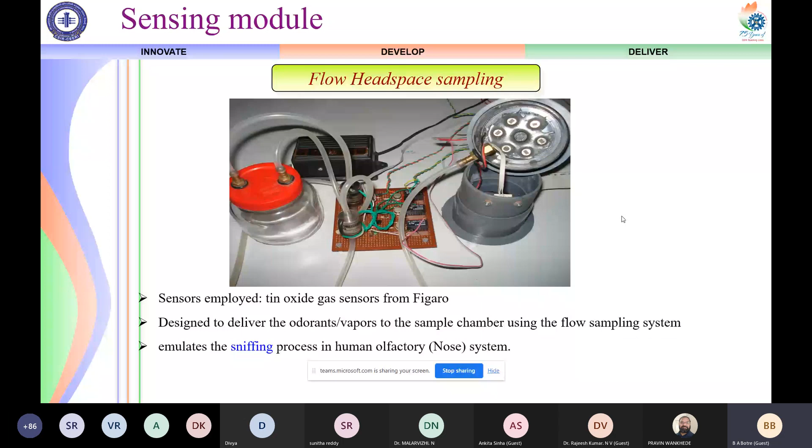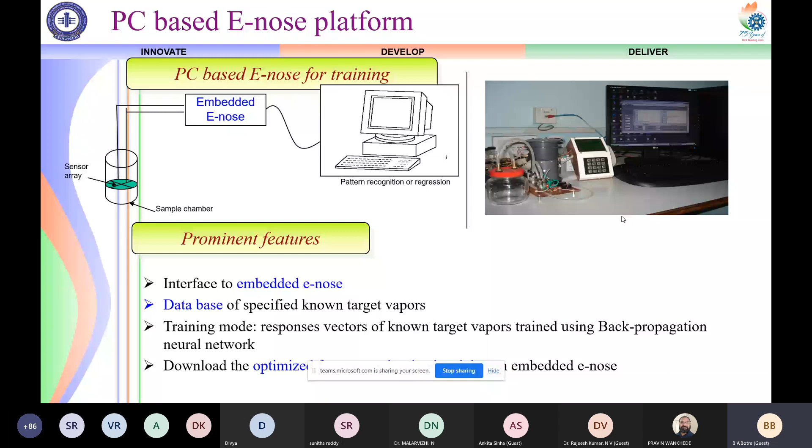The PC-based eNose is working with software developed indigenously for data acquisition, signal preprocessing, and learning the odor patterns based on artificial neural networks. These were developed indigenously in software to interface with the embedded electronic nose.

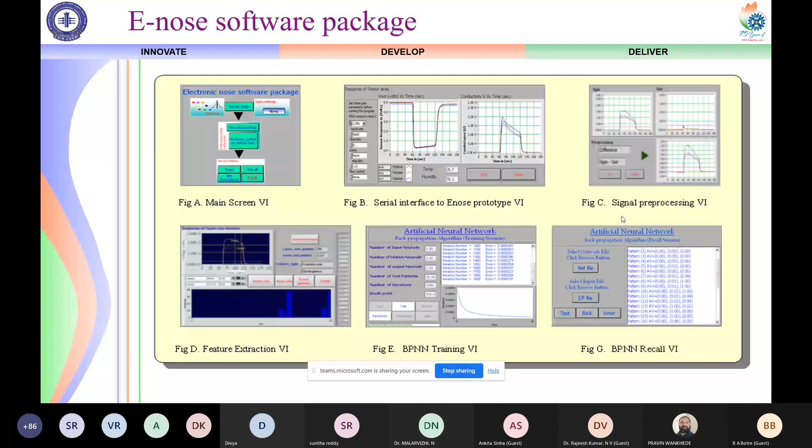As I mentioned earlier, during that time, around 2006, 7, and 8, we were using the 8051 microcontroller. During that time we had used backpropagation neural network for the detection of various patterns of smells and odors, and incorporated it into this as a product technology.

Now, with the advancement of the Internet of Things, these electronic noses can be interfaced with IoT. Various electronic noses can be interfaced with IoT for monitoring as well as analytics purposes of various odors emanating from various industries and various places in our country as well as outside the country.

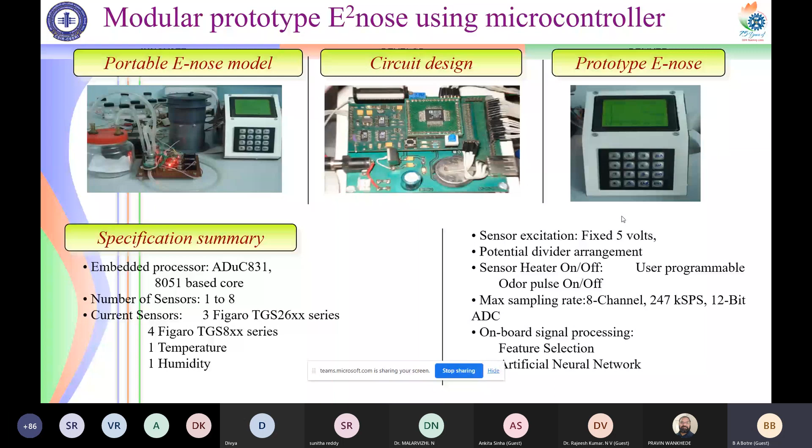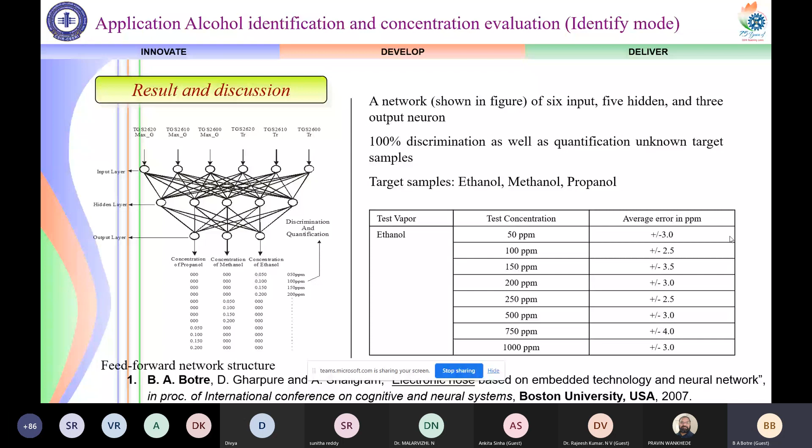The work developed in University of Pune was presented at an international conference held at Boston University during 2007. In conclusion, during the PhD research, we were able to develop an experimental setup of PC-based electronic noses, a prototype of embedded electronic noses, and their functionality and various operations were tested for food freshness detection as well as alcohol qualification and quantification. The research performed was presented in various journals as well as international and national conferences.

Now we will be moving towards development of a mobile odor tracking robot based on embedded technology. As I mentioned earlier, we developed electronic noses as part of research, and then we transformed that electronic nose prototype onto a mobile platform to track odor, which is essentially needed in various industries for detection of, let us say, explosives or any hazardous or toxic gases emanating from various places.

The concept was very simple. The electronic nose was interfaced with the mobile platform, and it was programmed in such a way that it was detecting odors coming from different directions, with this capability incorporated as an algorithm on the microcontroller, which was enabling detection of the odor as well as smell and giving actuations to the motors fitted onto the robot.

So this was the concept with which we started this activity, and we developed a prototype of an odor tracking robot based on indigenously designed hardware using the Atmega 32. It has an interface of A to D converters for interfacing different gas sensors and their signal conditioning.

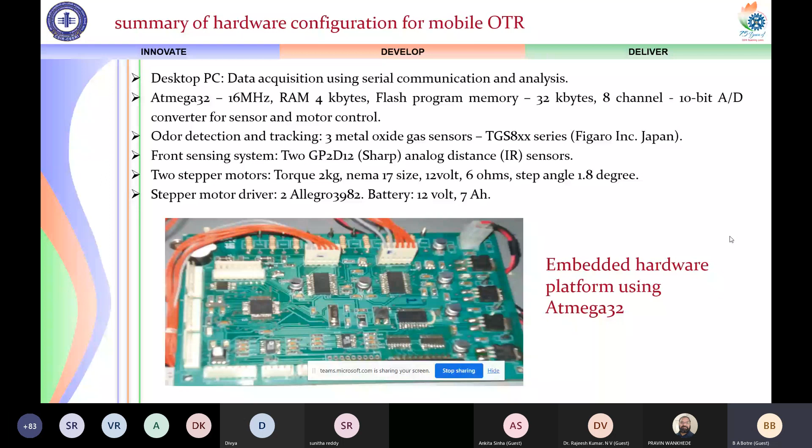This is the driver circuit which we developed during that time, and algorithm subroutine modules such as sensor A to D signal conversion, heater and fan control, motor control, LCD, keypad, serial data acquisition, and odor tracking algorithms were developed during that time in C language and incorporated onto the embedded system.

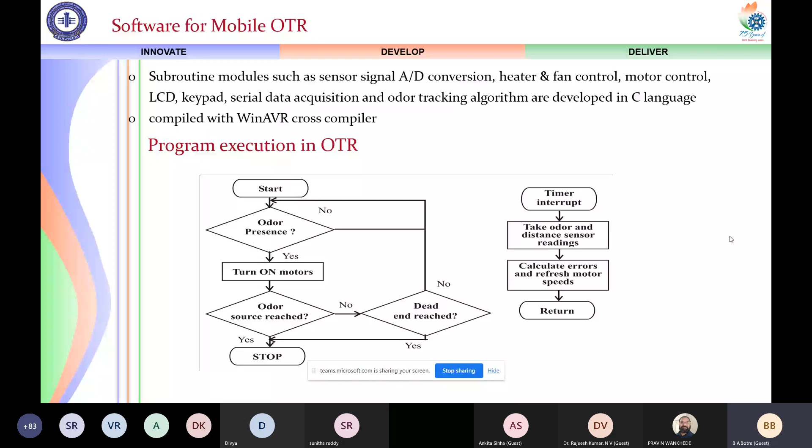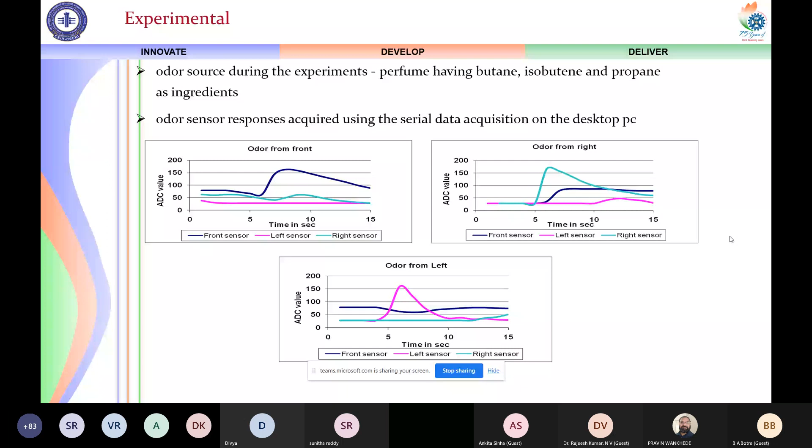Program execution in the odor tracking robot was successfully tested and demonstrated in our laboratory. These two slides highlight the tracking and sensing of odor data coming from different directions with the help of gas sensors, and processing that data with the help of the navigation algorithm implemented onto the mobile odor tracking robot. The robot prototype was developed successfully and tested in our laboratory.

This was tested with the help of some perfume odor source activated at 4 different locations, one after another. Two obstacles were placed in the approximate path of the robot, and it was allowed to pass through. It could detect the obstacles as well as track the odors as mentioned in the trajectory path.

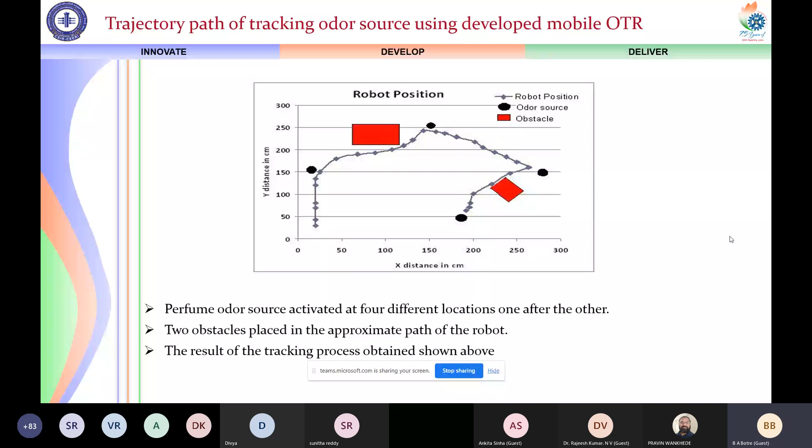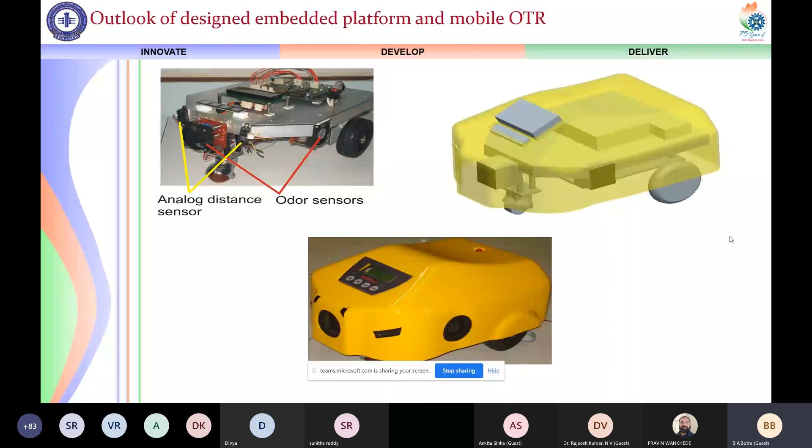This is the prototype of the skeleton of the robot as well as the final prototype of the odor tracking robot. It was presented at one of the IdeenExpo during 2009, and the Ministry of Science and Technology, Germany invited our team to participate there for 10 days.

This was developed as a prototype in one of the university laboratories. The German ministry invited our team to demonstrate this prototype to their students aged between 6 to 14, to give them motivation and inspiration seeing that such robots exist and researchers are inventing them, encouraging students to grab their attention and generate interest.

We have another 4 minutes before the break, and I would be giving you glimpses of the gas sensor system based on IoT for environment monitoring. This technology was developed in CSIR-CEERI during 2016 to 2019 as part of CSIR's FTT project.

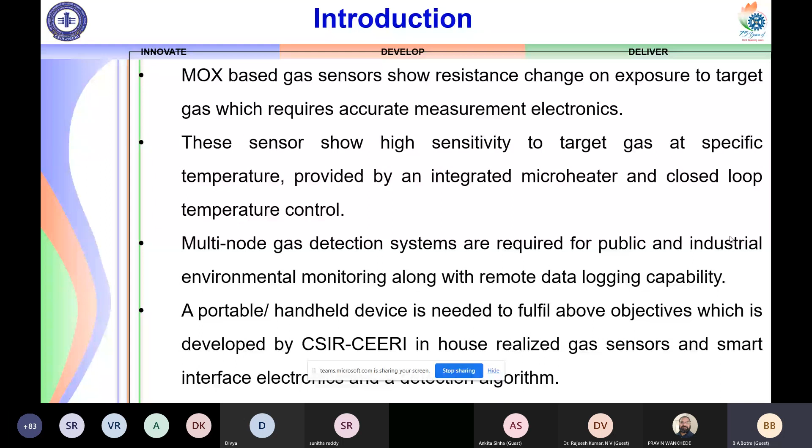This is the prototype of the gas sensor interface electronics and handheld display. We focused on readout electronics, which involved interfacing the gas sensor, signal conditioning, developing decision-making algorithms, and transmitting data onto the IoT platform. This is the prototype of the wall-mount gas sensor system developed in our CEERI.

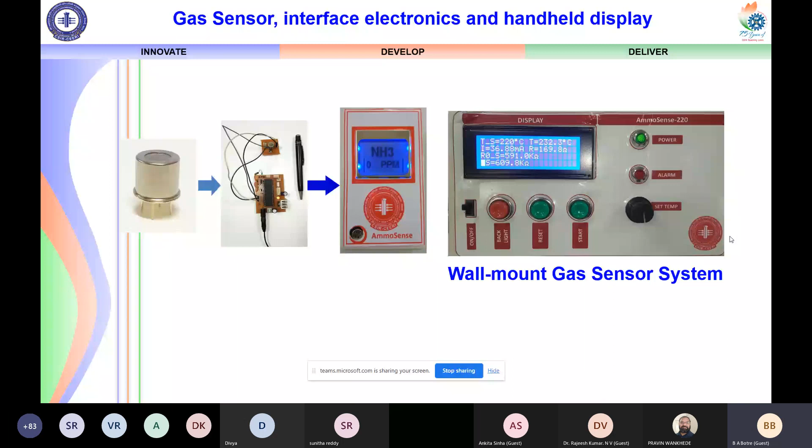These are a few of the experimental results performed with the gas sensor system in our laboratory. It was exposed to ammonia at different concentrations, and ammonia concentration versus resistance versus alarm plots are shown here. Extensive laboratory testing was performed with the gas sensor systems.

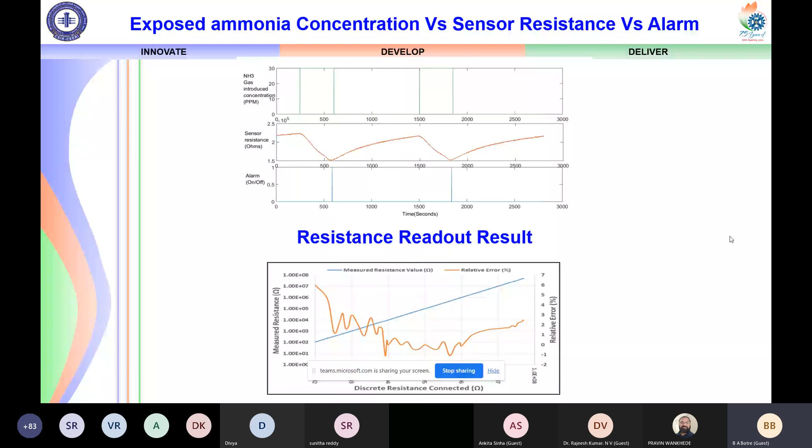A small program on PC was developed for recording data for further development of the closed loop control system needed for the microheater embedded inside the gas sensor and measurement of resistance.

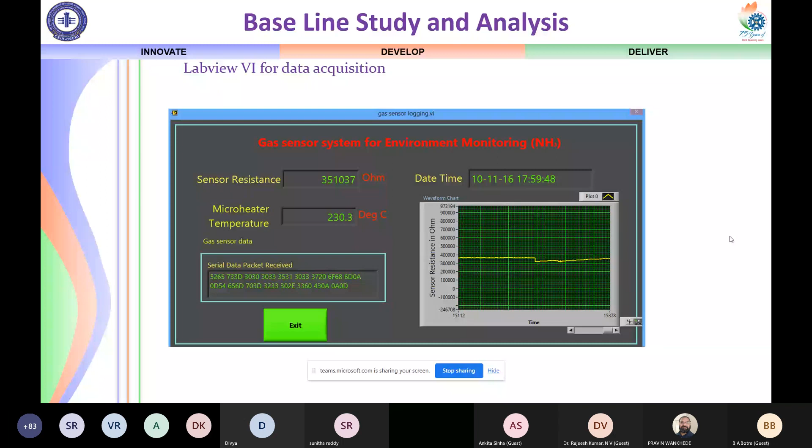These are plots of the algorithm output compared with sensor resistance, showing the baseline characterization performed in our laboratory.

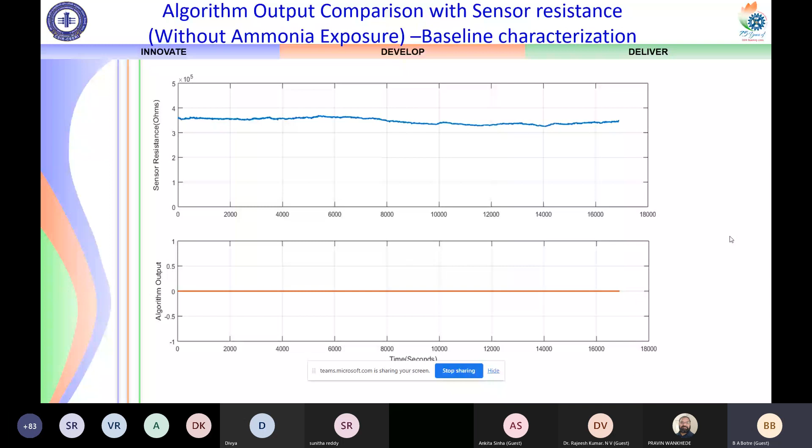These are the same plots, again showing baseline characterization. Here we show the actual exposure of ammonia gas to the gas sensor and their detection limits.

On exposure of ammonia gas to the sensor, our prototype could detect and give the alarm, and those alarms were recorded with the help of the indigenously developed data acquisition system.

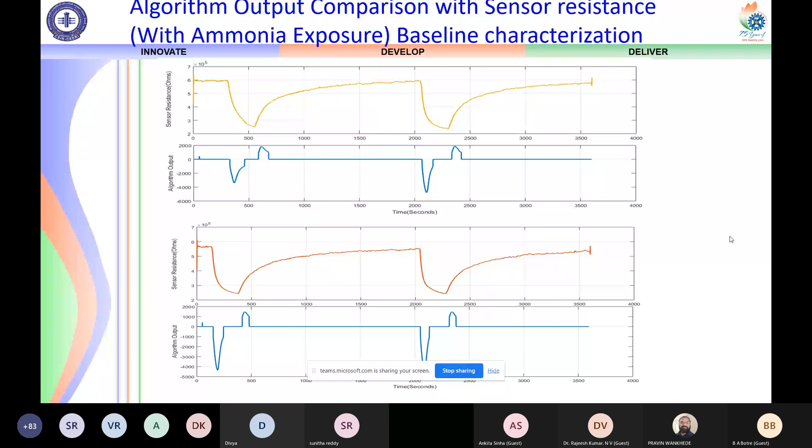This is the response of another algorithm which we developed in our laboratory for the detection of ammonia.

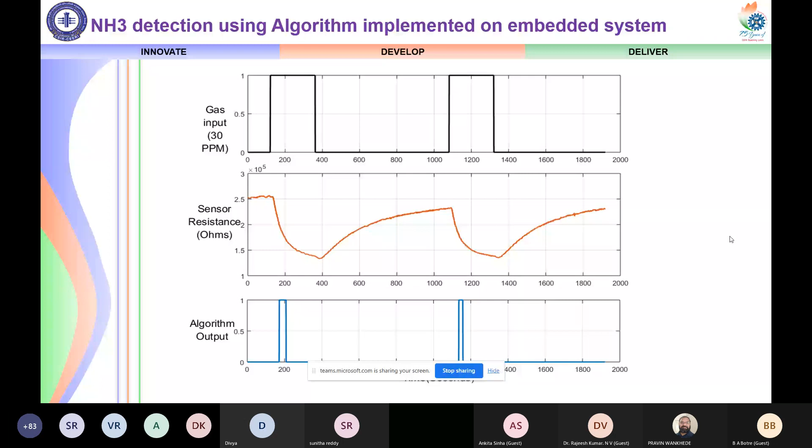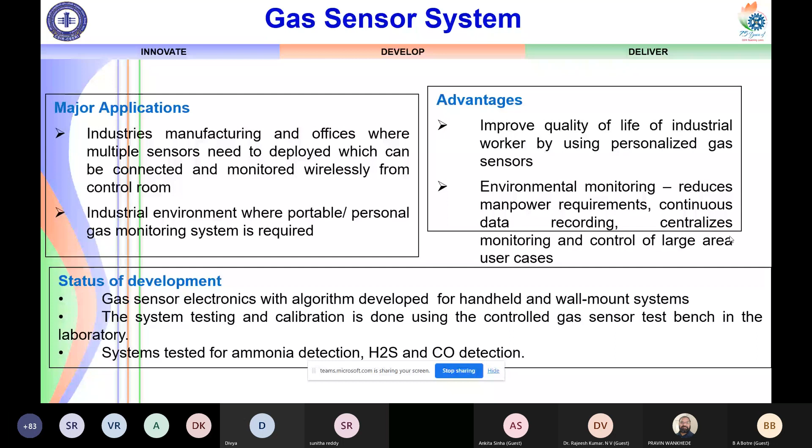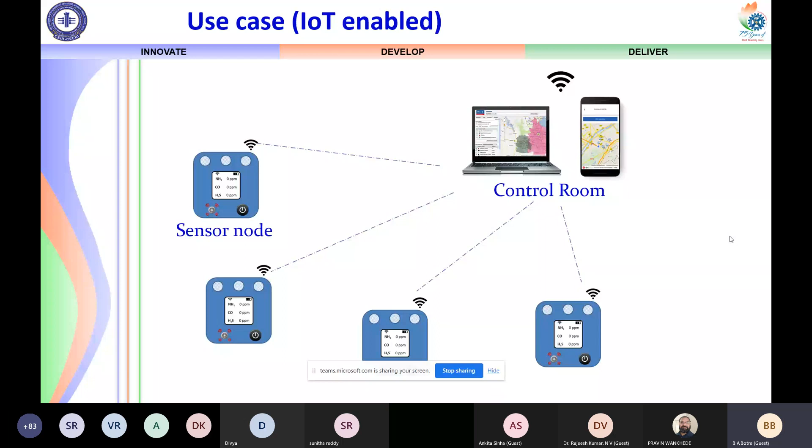Dear friends, as I mentioned earlier, guided by Professor Devsarkar sir, individual work could not achieve success. We have to work in a team, looking at different aspects of the prototype during research and invention.

We have to learn, implement, and keep practicing to take this research, convert it into technology, and then to the production level.

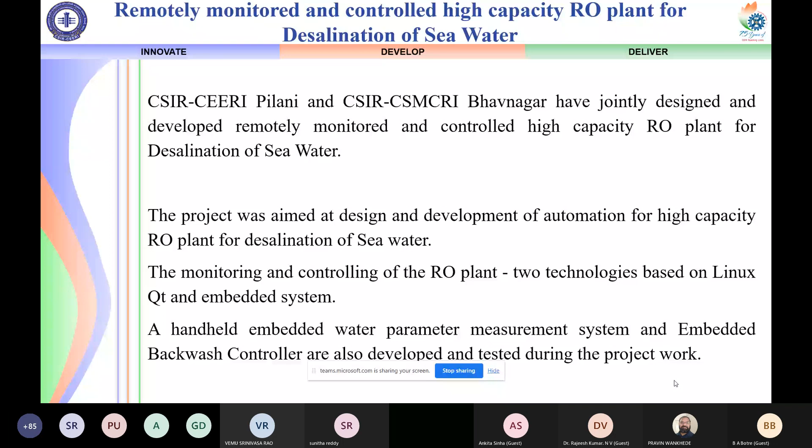Dear friends, I would like to say with immense pleasure that we could not only monitor the plant, we could generate control remotely with the help of the developed system. As you are all aware, monitoring with IoT devices is a simple task since all the devices are well organized and available. But developing electronics, interfacing it with IoT platforms, and generating control remotely by sitting in CSIR-CEERI, 1500 kilometers away, while controlling the plant situated in Bhavnagar from anywhere in the world, was the great success of this project. Our team worked hard, putting in all their perseverance and passion to develop this technology.

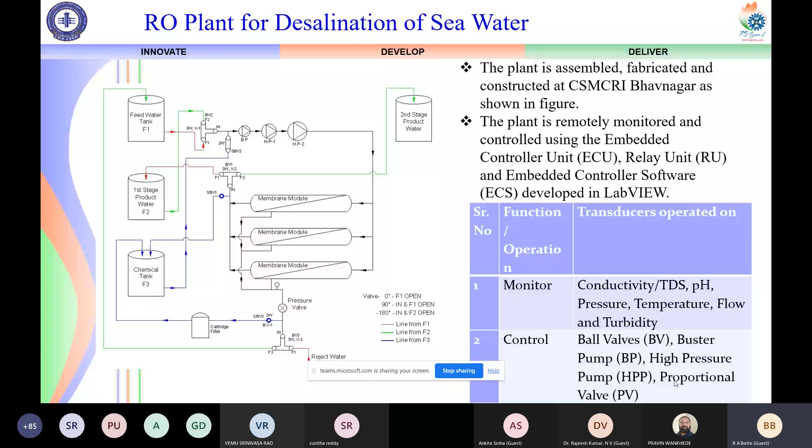This is the stack of the RO membrane, assembled and arranged in parallel and series combination for deriving the two-stage desalination seawater purification RO plant. This plant is controlled with the help of automation developed by CSIR-CEERI, and you can see various blocks of the plant. The arrows aren't visible, I'm sorry for that, but let me check the pointer. Yes, correct. So these are the RO membranes stacked in parallel and series combination, fitted in two stages.

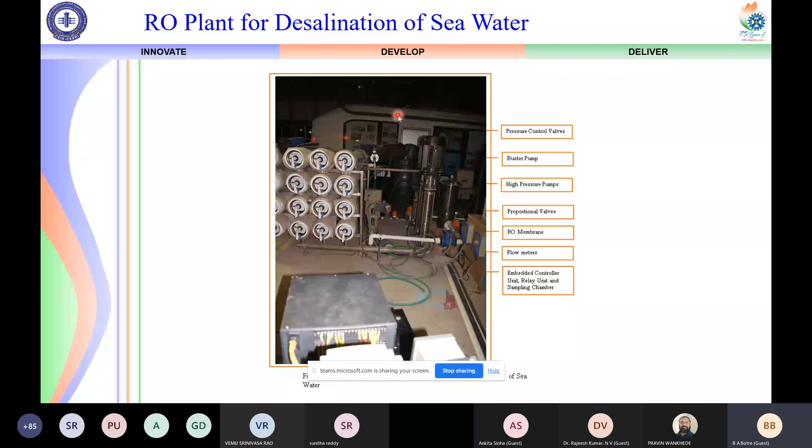Another experimental platform for RO automation based on Linux Qt system for monitoring and controlling desalination of seawater was also developed. The purpose was to use platforms which are open source.

I'm sharing different platforms which are either based on open source or on commercially available developmental platforms like Microchip's products, LabVIEW, and MATLAB products. These products have their own advantages and drawbacks, and it completely depends on the bill of material of the product's development, their usages, and their licenses.

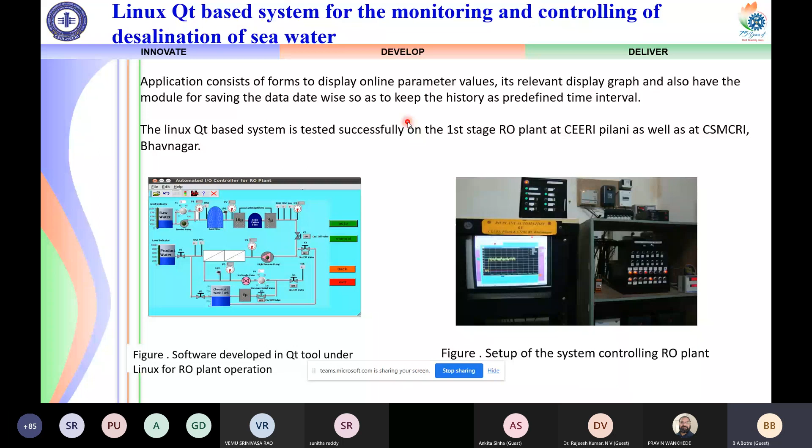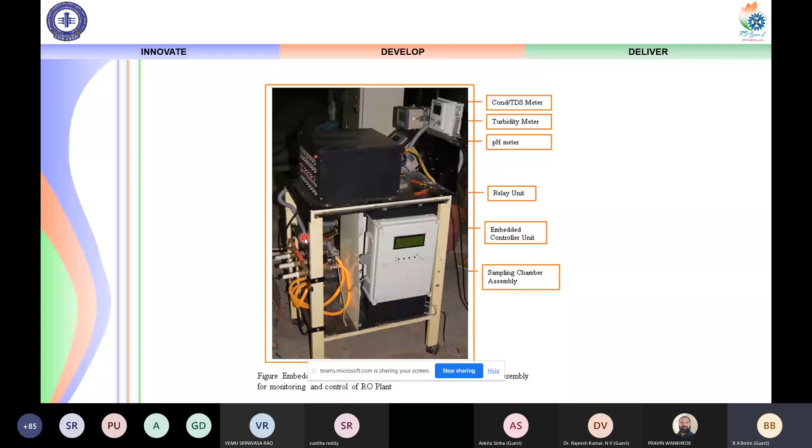You can see their wiring diagrams and the small chamber for collecting the raw water, monitoring it, then flushing it, then collecting the clean water, monitoring it, and flushing it. This is the cycle used for monitoring the parameters of the water.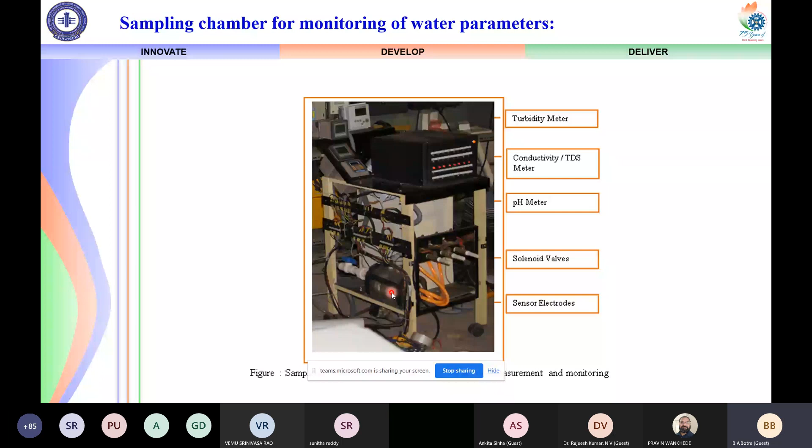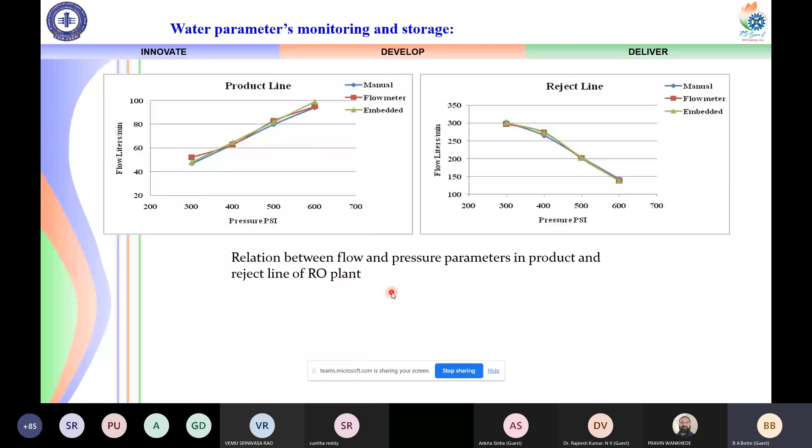These are the responses obtained for the product water, clean water, and reject water. These are the flow versus pressure plots obtained for understanding the performance of the RO membrane used for desalination of seawater — the relationship between flow and pressure parameters for the clean and reject waters. These are a few of the parameters we could record with the help of the embedded controller: conductivity, TDS, temperature, pH, and turbidity.

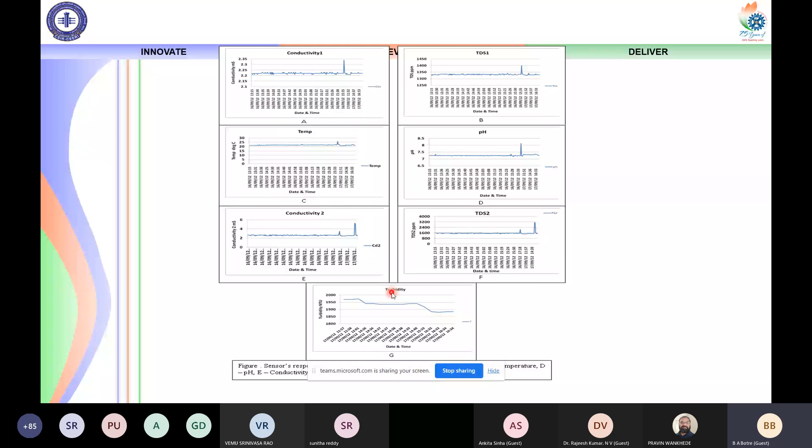This is the dashboard we developed with the help of LabVIEW software on the PC, which was interfaced with the embedded microcontroller. The embedded microcontroller was acquiring data from all the sensors, processing it, and transmitting it onto the IoT platform interfaced with the control room's dashboard with the help of LabVIEW Internet of Things toolboxes.

On the dashboard you can see various parameters of the sensors, recorded data, and RO modes of operation for controlling. The second pane shows the data recorded, which is then subsequently ported onto an Excel file with date and timestamp.

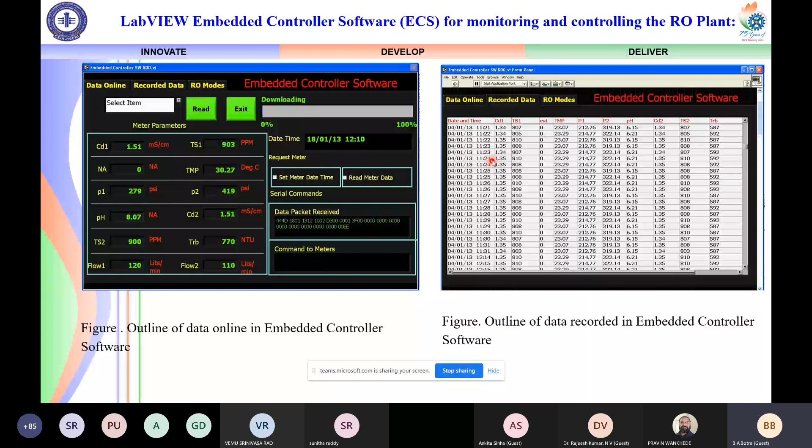These panes show the remote monitoring and remote controlling of the plant in different modes with the help of the Internet toolbox incorporated into the LabVIEW software. The right hand pane shows operating the plant from Internet Explorer, and the left hand pane shows controlling the plant on the dashboard.

So this is the technology I shared with you for remotely monitoring and controlling any water purification and recycling plant. This technology was developed and demonstrated almost 10 years back with the advent of new open source platforms like Linux, Python, TensorFlow, data processing, and statistical toolboxes. We can develop the same capability with the help of open source platforms and bring down the bill of material to enhance the capability of usage of the platforms.

At the same time, we can use state of the art technologies nowadays, recent developments, to make it much better than the technology we developed 10 years back. Certainly, toolboxes based on Linux operating system, Python, TensorFlow, and other toolboxes, along with IoT hardware available in the market nowadays, are enabling us to develop state-of-the-art remotely monitoring and controlling RO or recycling and water purification plants very speedily and in a short amount of time. I believe recent developments and availability of these platforms and toolboxes would certainly change our lives and development cycles of any product.

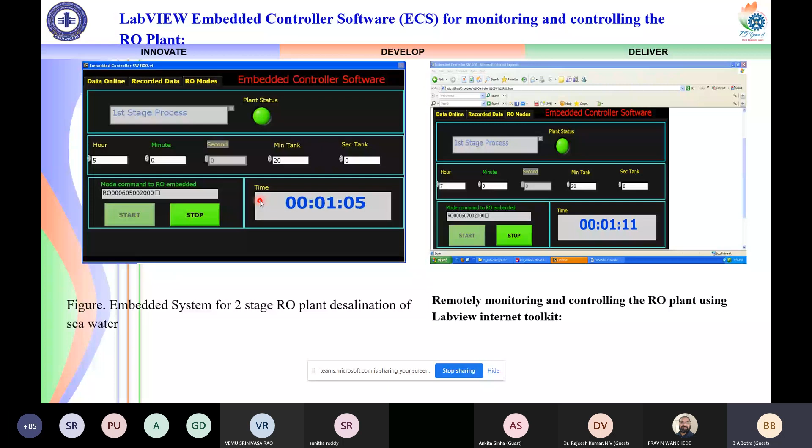Next, I will be talking about design and selection of online sensor solutions for water treatment systems. This water treatment system is associated with one of the project activities of Smart Water Grid, which was designed, developed, installed, and commissioned in our CSIR-CSIO. The project was titled IoT enabled priority based smart water distribution network system for community usage.

We considered three parameters before designing the smart water network. The first parameter category was based on water quality. What are the water quality parameters we have to take into consideration? Conductivity is the main parameter, then pH, turbidity, and other factors come into the picture — nitrates, temperature, dissolved oxygen, fluoride, and bacterial load. Important parameters, as mentioned earlier, are TDS, conductivity, pH, and turbidity.

Controlling parameters are associated with flow, pressure, filtration, temperature, level, valve condition, pump controls, UV treatment for bacteria to address bacterial challenges, and any triggers needed. Process conditions consist of different set points associated with pressure and flow. For any purification and recycling plant, these are the key process parameters to consider: pressure and flow, water pressure for the RO membrane, UV exposure, leakages, source water level, efficiency, condition of various subsystems, hydraulic conditions, stress, and corrosion.

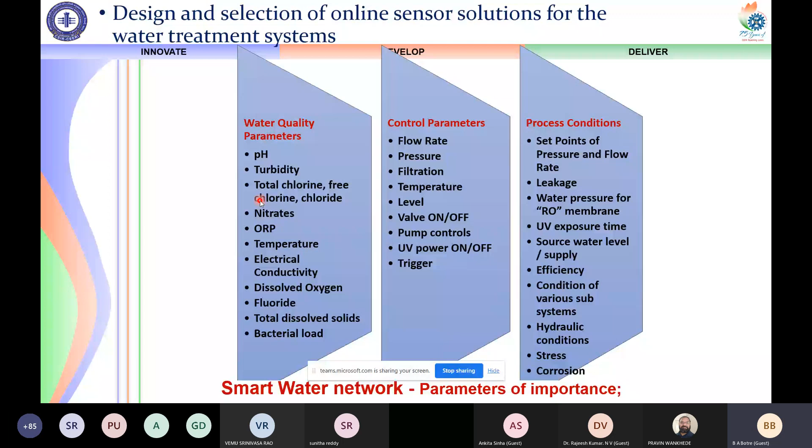This is the basic block diagram of the smart water grid, which consists of a water purification system based on RO membranes, filters, and UV treatment, along with the incorporation of various state-of-the-art technologies of control and instrumentation, IoT, and machine learning techniques for data processing.

These technologies consist of data acquisition, integration of sensor networks, smart meters, smart pipes, smart pumps, smart valves, data dissemination using internet and Wi-Fi technologies, data processing and storage. It would be involving well-known machine learning, AI, and cloud computing for management and control.

It is based on SCADA and PLCs, hydraulic modeling and analytics using EPANET and other well-known software, monitoring for detection, localization of leakages, visualization and decision support.

So with these technologies of water purification and recycling, filters, and state-of-the-art instrumentation and control technologies, one can solve challenges of plant health monitoring, leakage detection, data-driven decision making for controlling the water supply in the water supply network, water quality management, and overall water purification to the supply network.

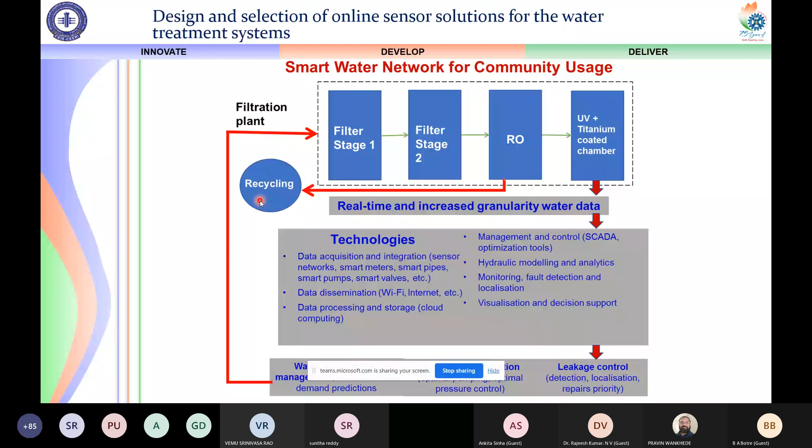This is the setup of the smart water grid which we have in our CSIR-CSIO. It consists of a two-layer structure, pipe structure with various sensors and actuators fitted onto them. Various equipment, sensors and actuators fitted onto the pipe network are mentioned here in the table: pressure transmitters, temperature sensors, ultrasonic flow meters, electromagnetic flow meters, vibration sensors, level sensors, valves, PIV valves.

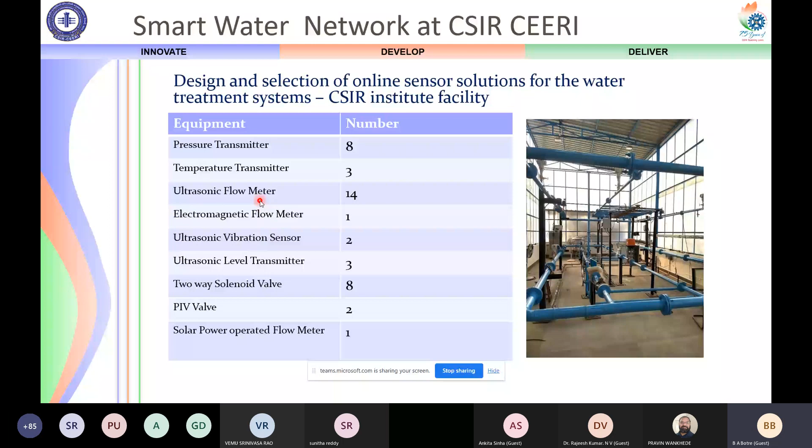Solar operated flow meters - this is the close view of the various devices fitted onto the pipeline structure of the smart water grid. If you see the bottom, it is showing a layer of flow meters, ultrasonic flow meters, which is emulating the water meters needed for billing generation, or making of the billing system automatically.

So we can have sensors to record the usage of water, and we can develop algorithms and associate them with the cost of the usage of water, and we can make a billing system automatic and send it to the end user. Other devices fitted onto the two-layer architecture of the pipe network are given in the table, like TDS sensors, pH, turbidity, SCADA and PLC mechanism, tanks and pumps.

So this is the capability or experimental setup test rig which we have in the form of an IoT enabled smart water network in our laboratory, which is enabling us not only to study, model and simulate the water supply network, but whatever we perform as a simulation study, we can implement and test robustly in our laboratory with the help of this experimental setup.

Now I'll be talking about the next project activity, which is associated with the AI controlled linear displacement actuator based on thermoresponsive smart materials. It is SMILDAS. It was a sponsored project under the CSIR mission, performed by two organizations - the leading organization CSIR AMPRI in Bhopal and CSIR CEERI. AMPRI team developed the SMA actuator, smart materials actuator, and CSIR CEERI team indigenously developed the AI controlled electronic hardware for operation of the smart material based actuator.

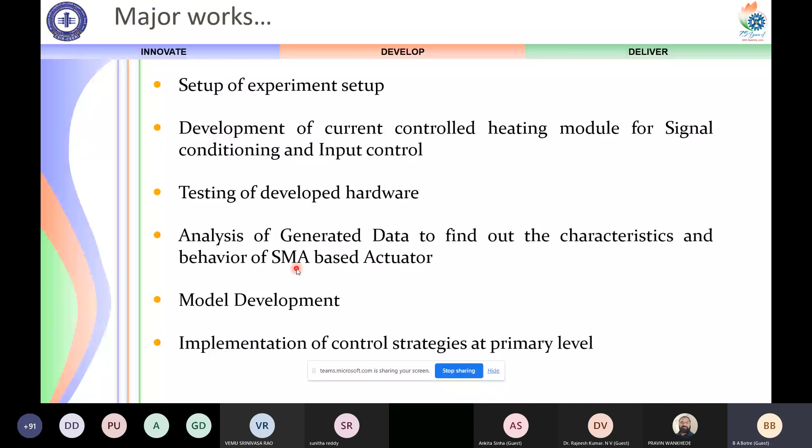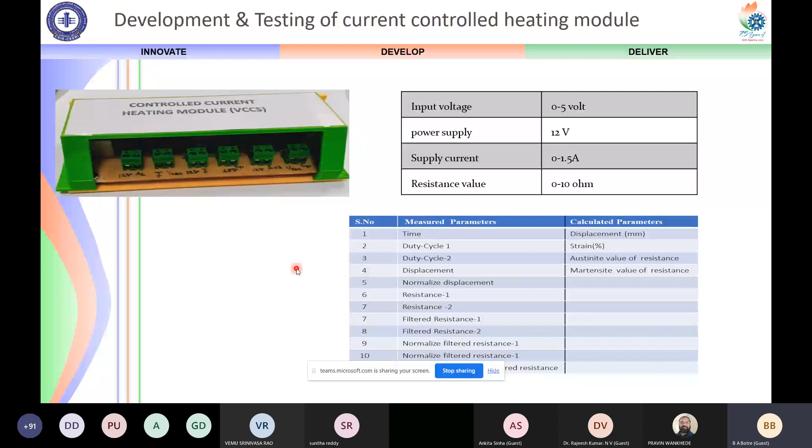This is the heating module and their specifications which we developed in our CSIR-CSIO for controlling the SMA actuator. These are a few of the improvements in the SMA actuator driver board which we considered and made during the development cycle.

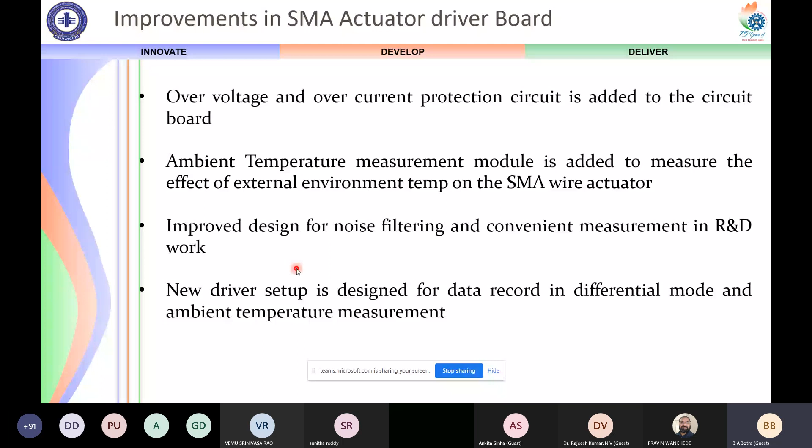The main purpose of development of the AI controlled SMA actuator was to make the system sensorless. For any actuator, feedback is essential, but with this small low cost actuator, using costly sensors is not feasible. To overcome this challenge, our team used electrical and mechanical parameters of the actuator itself to record and measure the displacement with the help of AI technique, which enabled us to make the system sensorless and generate the control action based on AI techniques.

This LVDT is used during the experimental purpose only. Subsequently, while fitting the actuator onto the 3D printer, only our electronics and actuator were fitted, using self-sensing capability and AI-based control action.

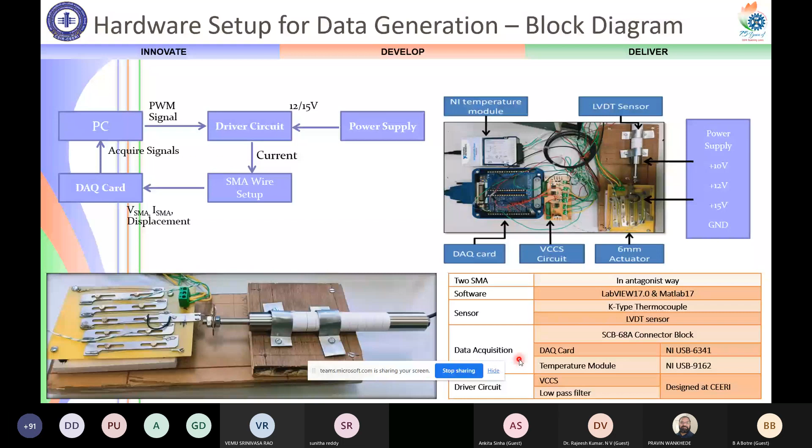A complete setup is shown for experimenting, data generation, training using the AI technique, developed for generation of the control action, and making the measurements for fulfilling the sensorless development of the SMA actuator. These are the specifications of the DAQ system and data generation.

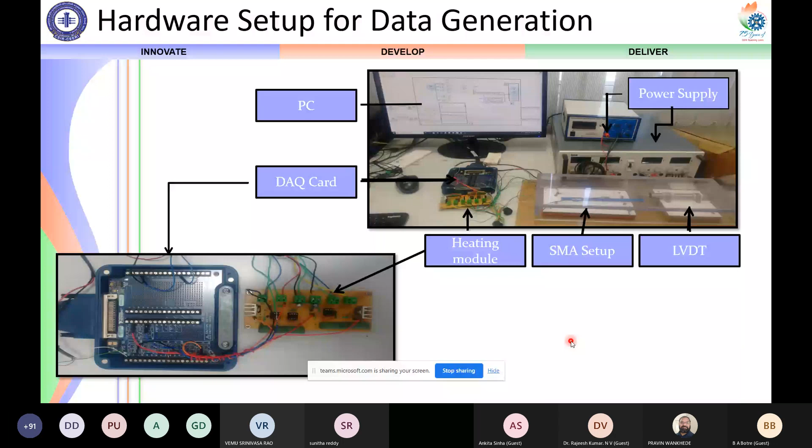During the development cycle, we perform various analysis techniques on the data to find out the characteristics and behavior of SMA-based actuators. These actuators behave such that on excitation they contract, and after removing the excitation they expand. But while performing these actions they exhibit hysteresis, and this hysteresis is the challenge for research. Our team developed an AI controlled mechanism to compensate for the hysteresis, transforming the SMA actuator from austenite to martensite and martensite to austenite phases.

These are the necessary improvements in software which we performed for improvement of the data circuits. As I mentioned earlier, any research requires modeling and simulation. For the SMA actuator, we performed modeling and simulation with the help of thermal modeling, and their modeling stages are given here, based on electrical current, wire temperature, austenite fraction, and mechanical strain.

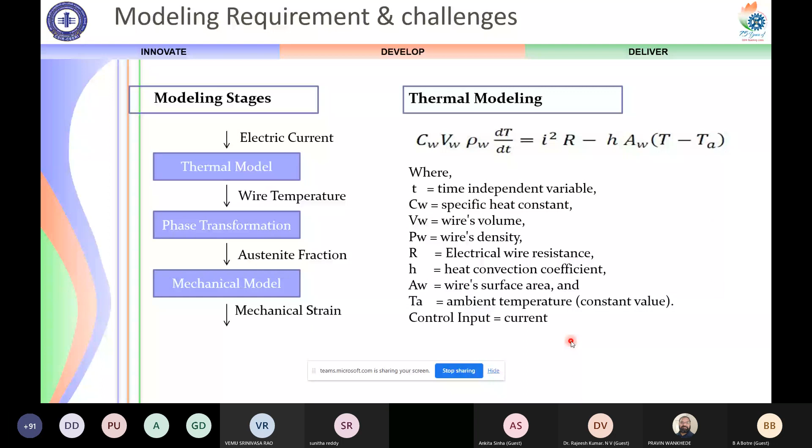Two models our team proposed. One of our scientists, Samar Singh, developed this AI controller indigenously in CSIR CEERI. The first model he proposed was based on a single layer architecture consisting of resistance difference, single layer RNN, and displacement.

The next model he proposed was based on an intercoupled RNN, which takes into consideration the SMA actuator's two wires and their intercoupling parameters. The RNN parameters are tuned such that the effects of both SMA wires fitted onto the actuator are reflected into the development of the proposed RNN architecture to derive the displacement parameter.

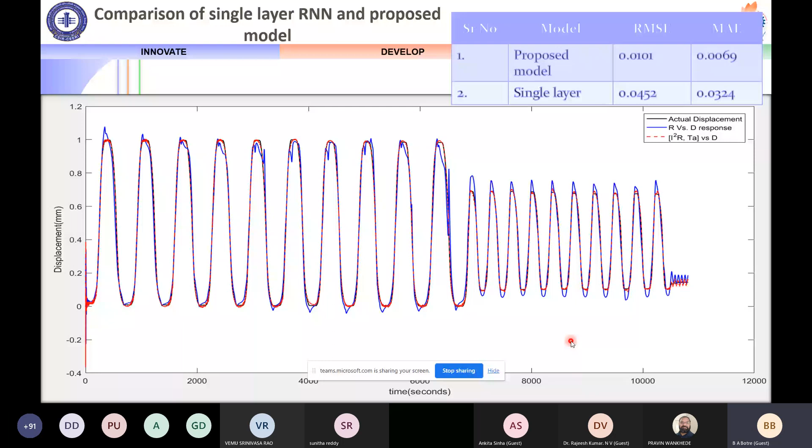Dear friends, I have given you a few highlights of the research we perform in our laboratory, from the perspective of modeling, simulation, model development, their implementation, and robust testing.

From here onwards, technology development and prototype development begins. In the next AI mission project, our team proposed to develop the prototype technology of the 3D printer model, interfaced with the indigenously developed SMA actuator and AI controlled linear displacement sensor.

Now let's come to the last assistive technology project we are working on in our laboratory. It is associated with making a low power electric vehicle for outdoor mobility of differently abled persons. The project was sponsored by DST as well as under the CSIR mission.

I'm sharing a few of the activities we performed, not the complete set, due to IP and copyright limitations. One study we performed was parameter estimation and comparative analysis of control design techniques for BLDC motors. As you are aware, BLDC motors available in the market are mainly imported from China. The main challenge when designing any control system is having the motor parameters. These Chinese motors don't provide any manual with their motor parameters, so the only option is to derive these motor parameters by performing experiments in our laboratory.

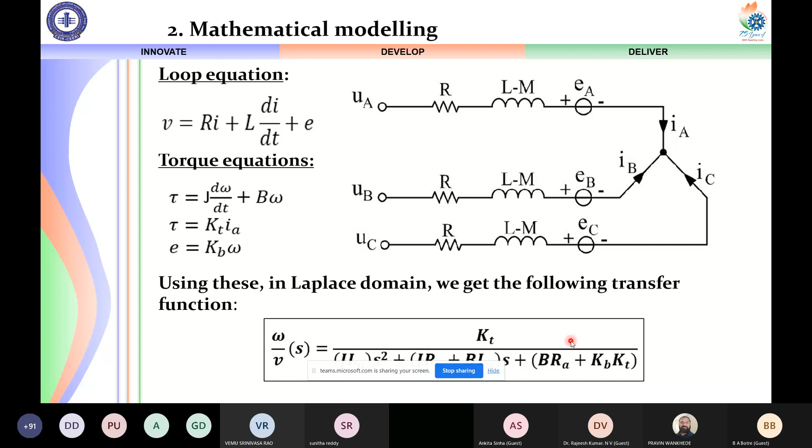The input and output parameters, motor parameters, or derived parameters are considered in this equation. These are the parameters which we derived in our laboratory for a BLDC motor of 250 watts, including stator resistance, stator inductance, moment of inertia, friction coefficient, torque constant, and back EMF constants. These values were derived experimentally in our laboratory.

Another aspect we worked on was deriving the gear ratio for obtaining the speed of the BLDC motor. These BLDC motors come with an internal planetary gearbox, and we have to take into consideration its internal gear ratio while deriving the speed measurement. So we performed two experiments: deriving the gear ratio and parameter estimation, before designing the control system.

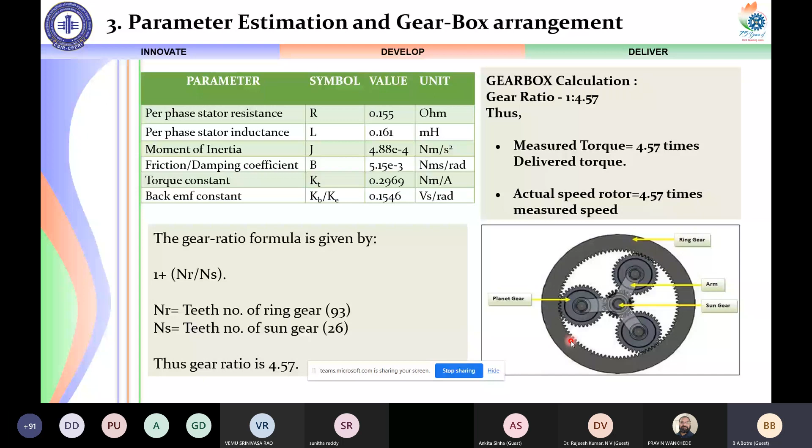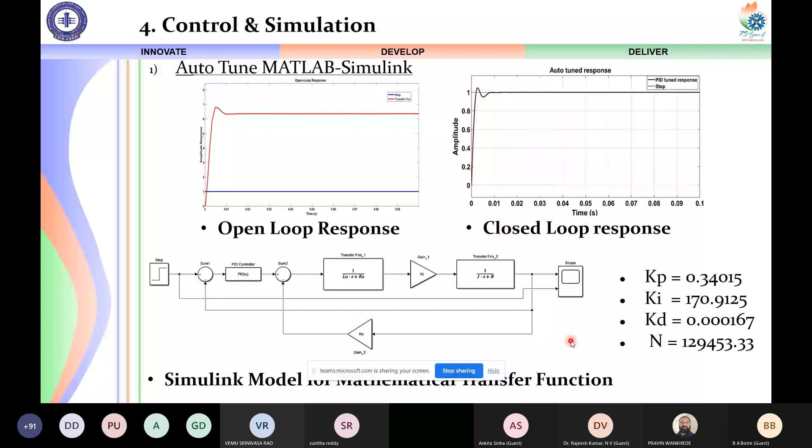Subsequently, we developed normal PID, genetic algorithm, and fuzzy tuning PID based control design techniques onto the physical model of the BLDC motor.

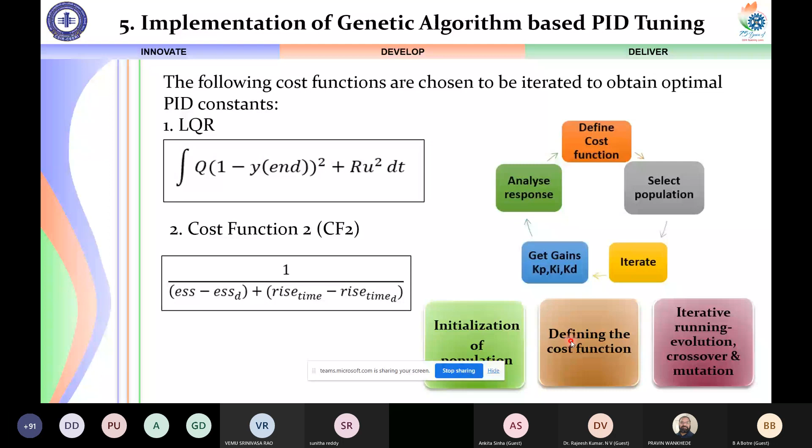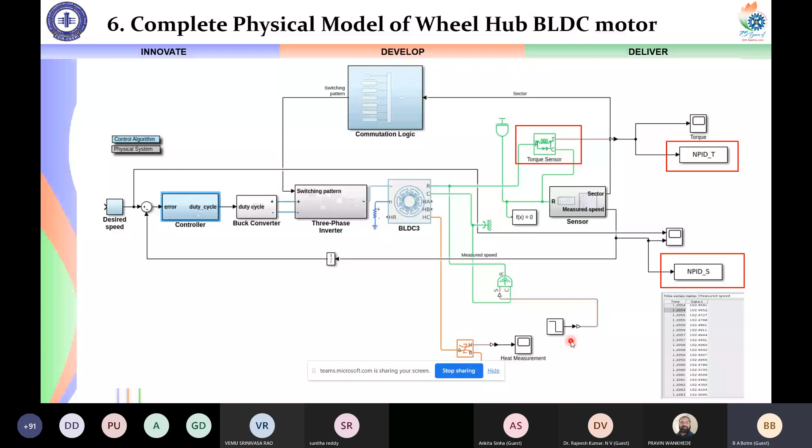A fuzzy controller was also designed and tested with the mathematical model and physical model, and their results were observed and recorded in the laboratory.

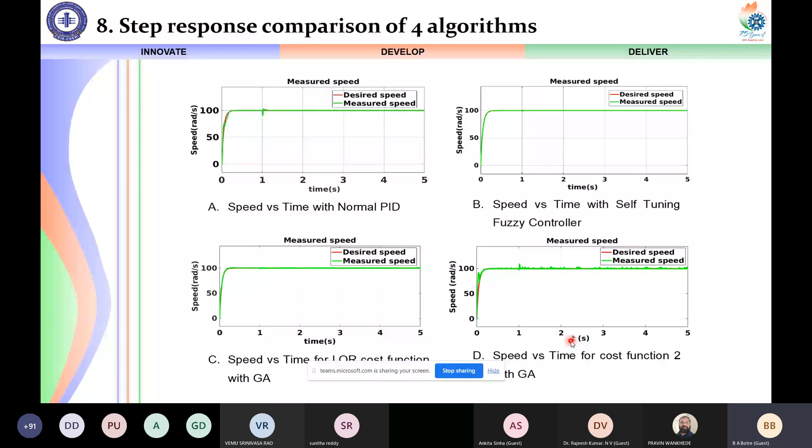Step response comparison of the four proposed algorithms is shown here: normal PID as speed versus time response, then the self-tuning fuzzy PID response, third the LQR cost function with genetic algorithm, and last the cost function 2 with genetic algorithm. These control design algorithms were simulated, implemented, and tested in MATLAB, and their observations were recorded for torque versus speed.

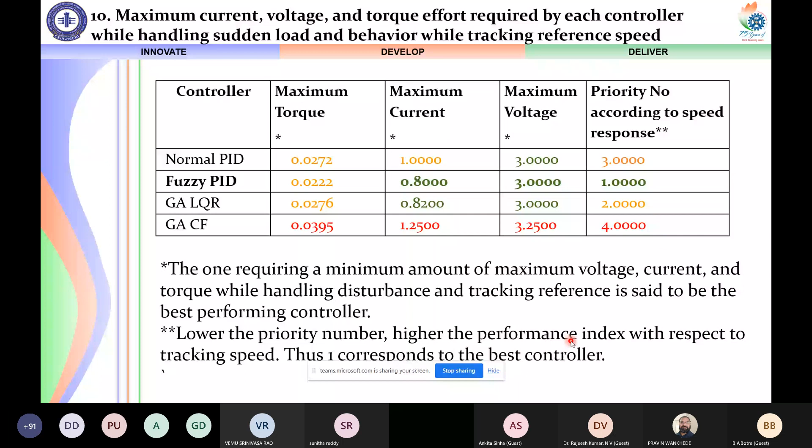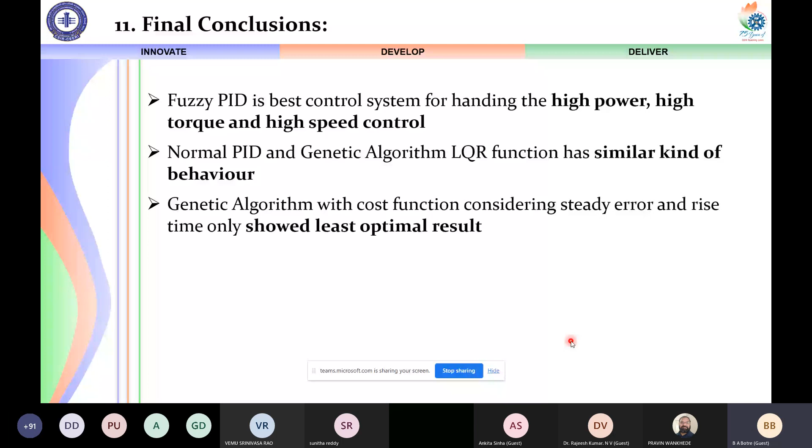By applying conditioned load torque, we measured the maximum current, voltage, and torque effort required by each controller while handling sudden load and tracking reference speed behavior. From this study, modeling, and simulation work, it is observed that fuzzy PID is the best control system for handling maximum current, voltage, and torque effort while applying sudden load, giving good results for handling high power, high torque, and high speed control needed for the BLDC motor, as compared to the other proposed control techniques.

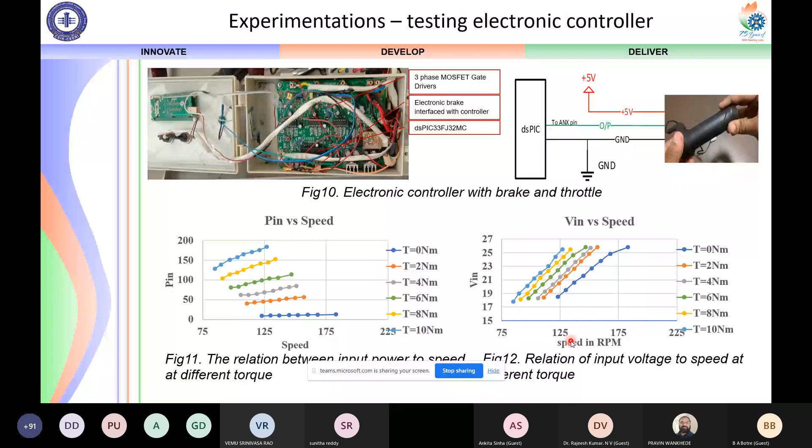This is the electronics which we developed in our laboratory for controlling the BLDC motor, and their results are shared here. So why did we design this control system for the BLDC motor only for research purposes in the laboratory?

No, it is needed by the underprivileged category of people. I remember a quote mentioned by Dr. Raghunath Mashelkar: we should develop high-end technologies for poor people. There are high-end technologies for rich people, or say normal middle class and above people, and low-end technologies for poor people. But a researcher must focus on developing high-end technologies for underprivileged and poor people, which will give much more satisfaction from the perspective of societal development.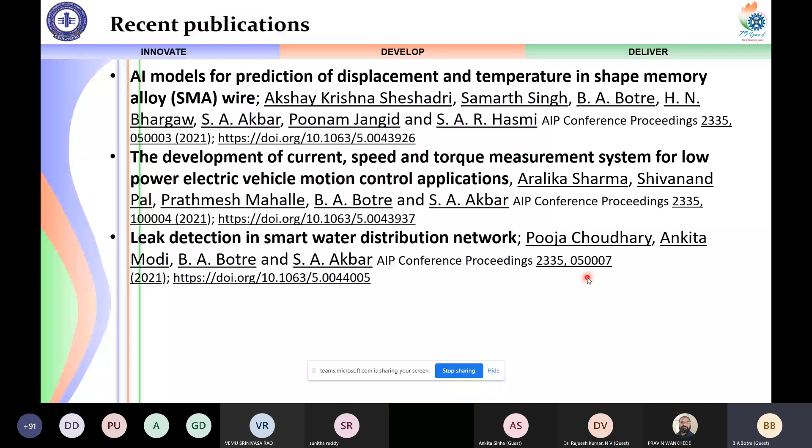The students worked on a series of projects on water grid and control systems and participated in NTPC and IET NTPC competitions, and all students worked from home. They had not come physically to work together in our laboratory, yet see the quality of the work, the skills, methods, and techniques which they developed and delivered in their contribution to the project work, as well as winning prizes in the national level IET NTPC technical research paper competition.